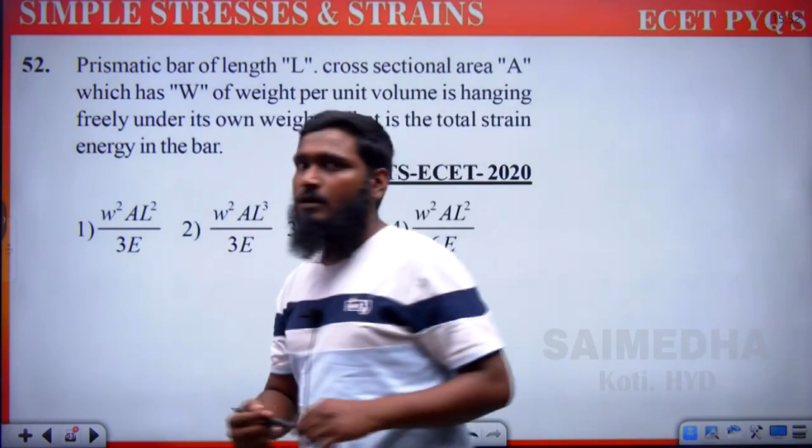Now let us see the next question. A prismatic bar of length L, cross sectional area A, with W weight per unit volume, is hanging freely under its own weight. What is the total strain energy in the bar?

We have just discussed strain energy. Strain energy U is equals to half into load into extension, that is half into P into delta. This formula is used whenever the load is constant.

Now if the load is varying, we have another formula. When the load is varying, U is equals to the integral from 0 to L of P square dl, divided by 2AE. This is the formula we use.

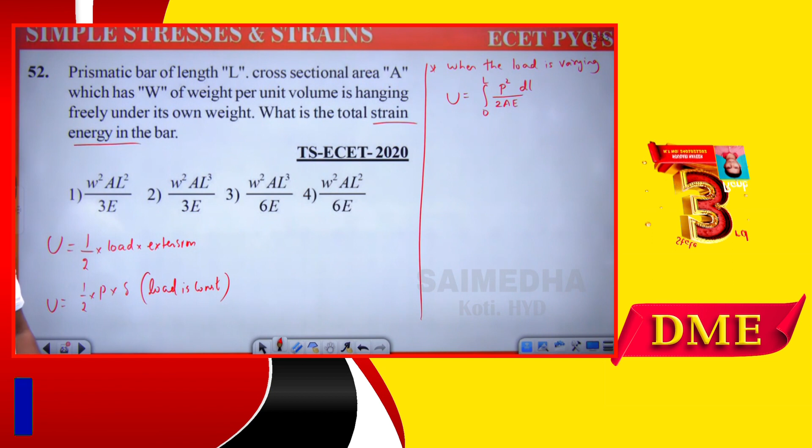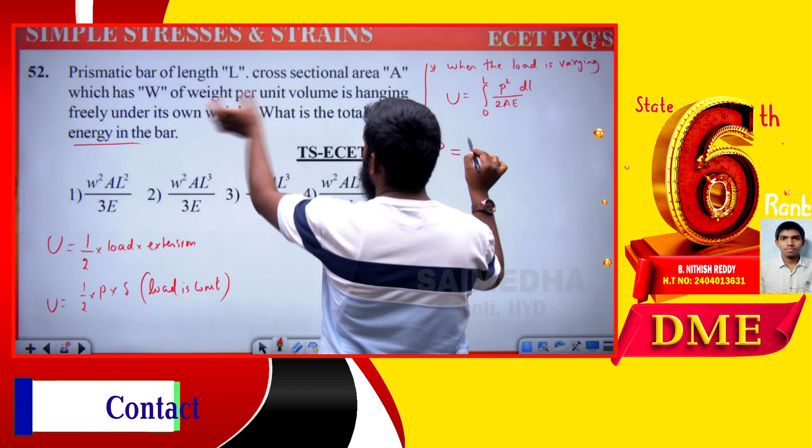Now to find the load, due to its self weight, what is the load? The P value we take is equal to specific weight. Specific weight means weight per unit volume, W. Volume we take as A into L.

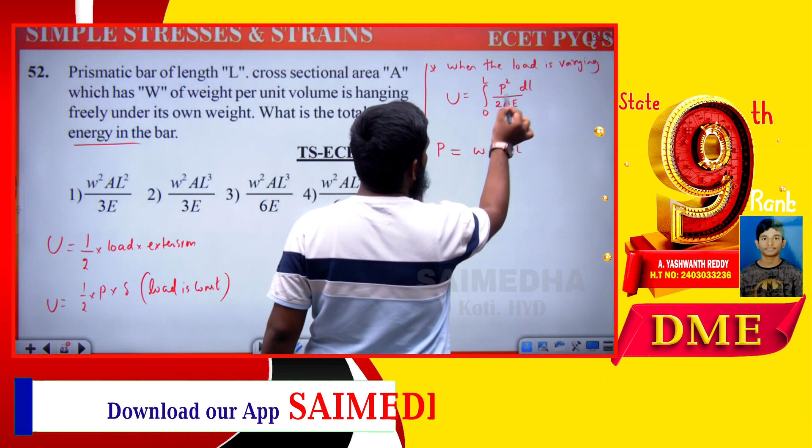Specific weight into volume, where volume is area into length. So in place of P, we substitute this complete term. So U is equals to integral from 0 to L of W square into A square into L square dl, divided by 2AE.

Now one A gets cancelled, and all these terms are constant. Integral of L square means we use the integration formula, integral of x dx equals x square by 2. Similarly, integral of x square dx equals x cube by 3. Whatever limits we have, we substitute upper limit minus lower limit.

So here, U is equals to W square A divided by 2E, written as it is. Now, integral of x square is x cube by 3. Similarly, integral of L square is L cube by 3, with limits 0 to L. Now we substitute these limits, upper limit minus lower limit.

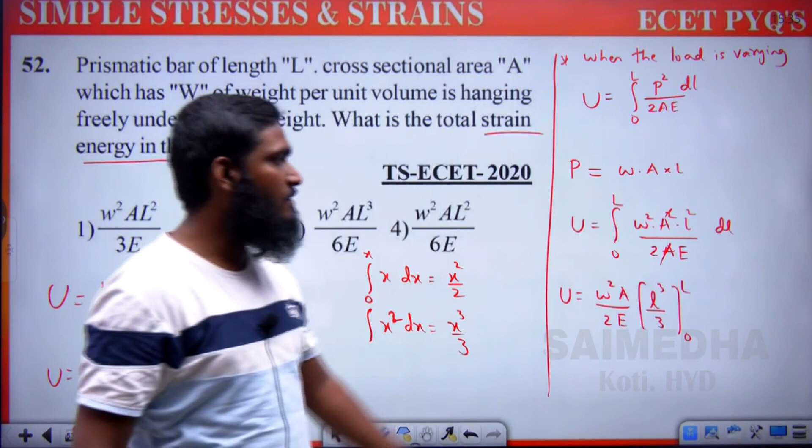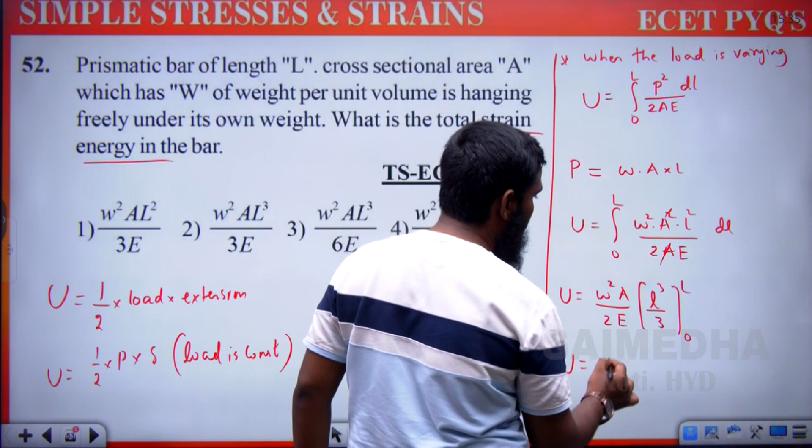Upper limit means substituting L, minus lower limit, substituting 0, which becomes zero. So directly we get W square A into L cube divided by 2 into 3, which gives 6E.

Now let us check the answer we are getting.

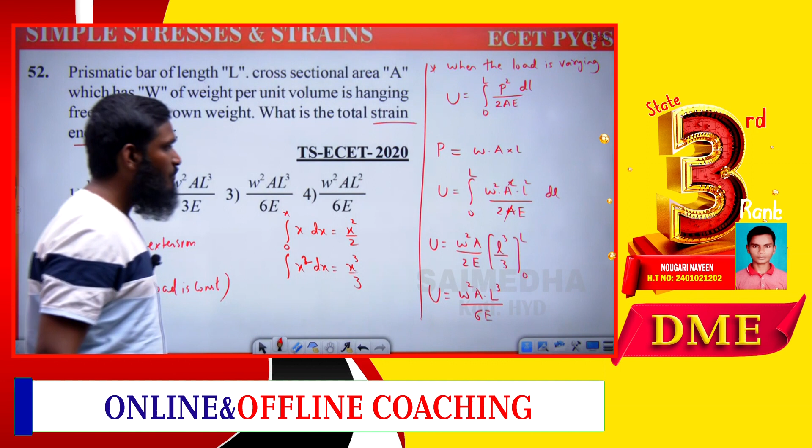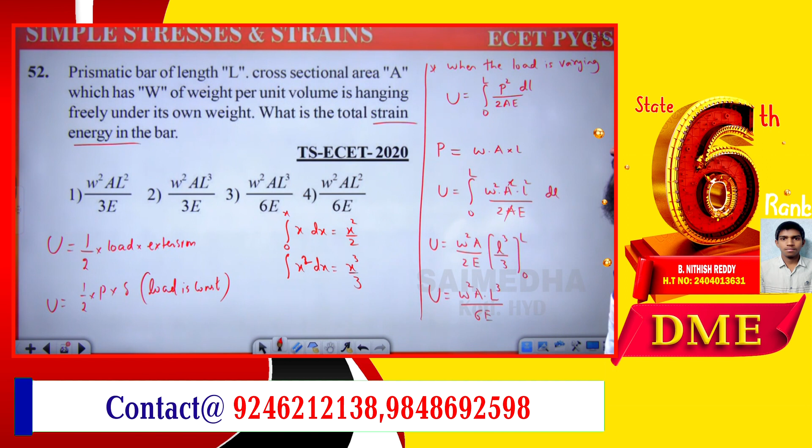So W square A L cube divided by 6E. Divided by 6E means let us go with the third option. W square AL cube divided by 6E. Third option is correct. Now let us go with the next question.

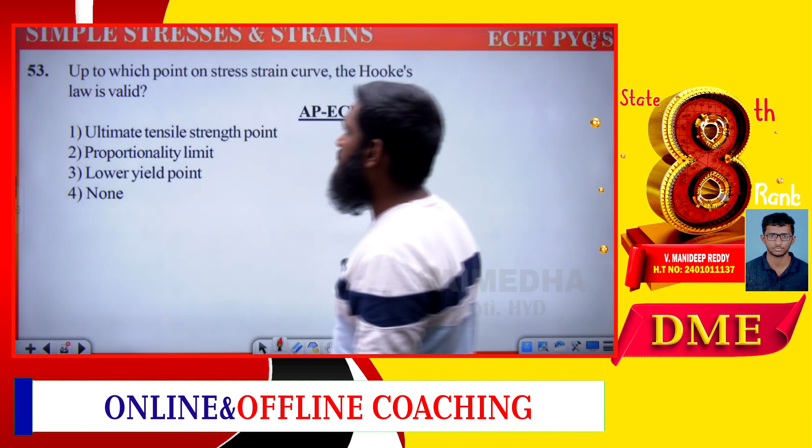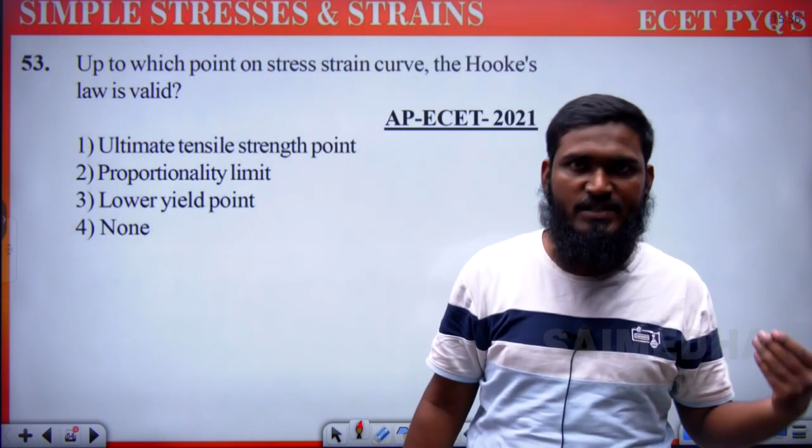Up to which point on the stress strain curve is Hooke's law valid? This question has been repeated many times. If proportional limit is mentioned, then we have to go with that option. If proportional limit is not given, then we have to take it as within elastic limit. As per our options, proportional limit is already mentioned, so the second option is correct. Hooke's law is valid up to the proportional limit. Second option is correct.

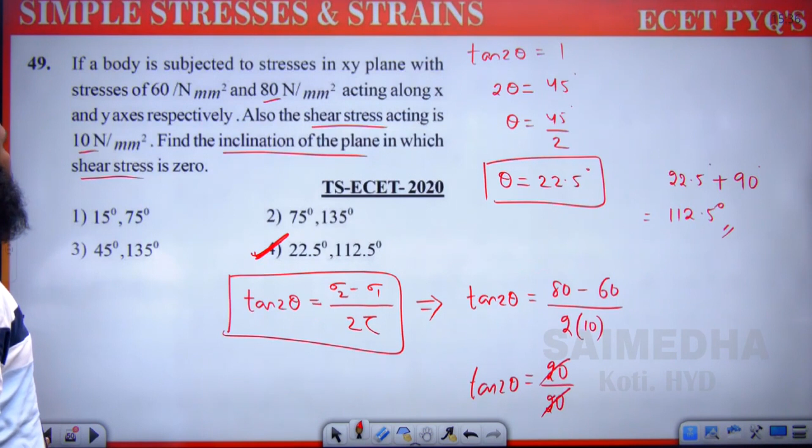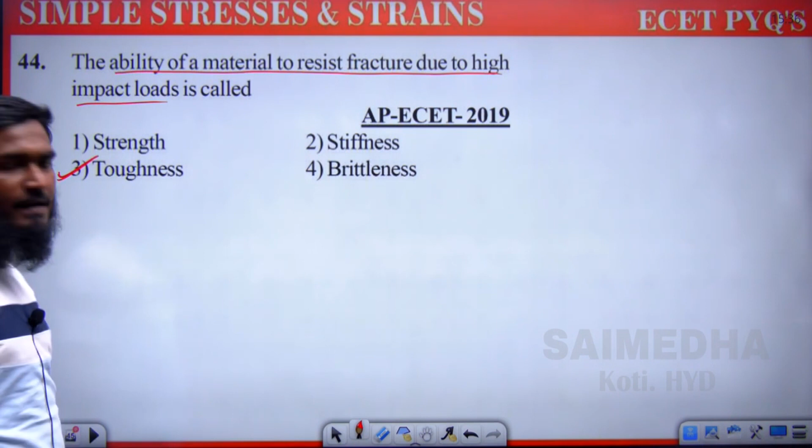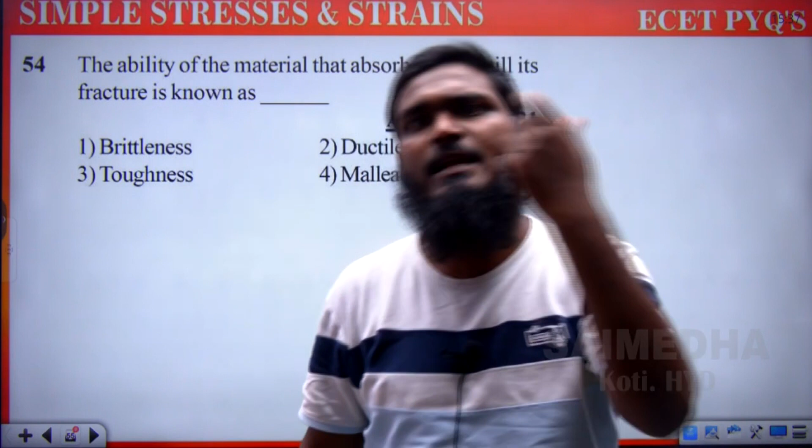Now next, the ability of the material that absorbs energy till its fracture. Just now I have given you some toughness definition, either this part or one more toughness part we have taken over here. The ability of the material to resist fracture due to high impact loads, we have also taken as toughness. One more definition we are having: the ability of the material that absorbs energy till its fracture - that we call toughness. If it is within the elastic limit, same definition, but instead of fracture, within elastic limit is given, then we have to call it resilience. So over here let us go with the toughness part.

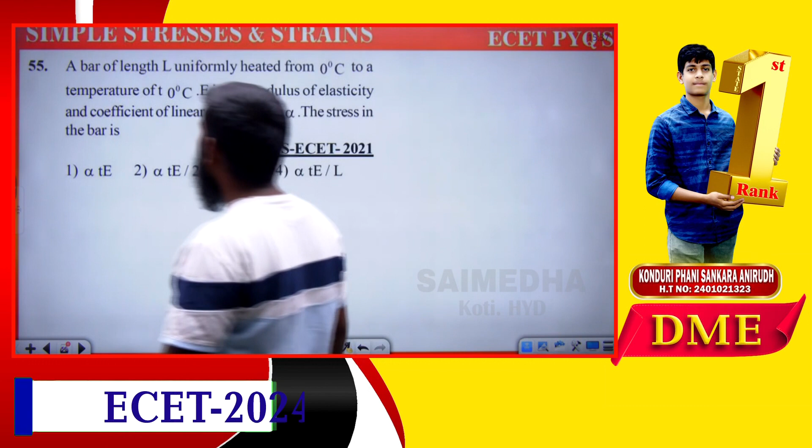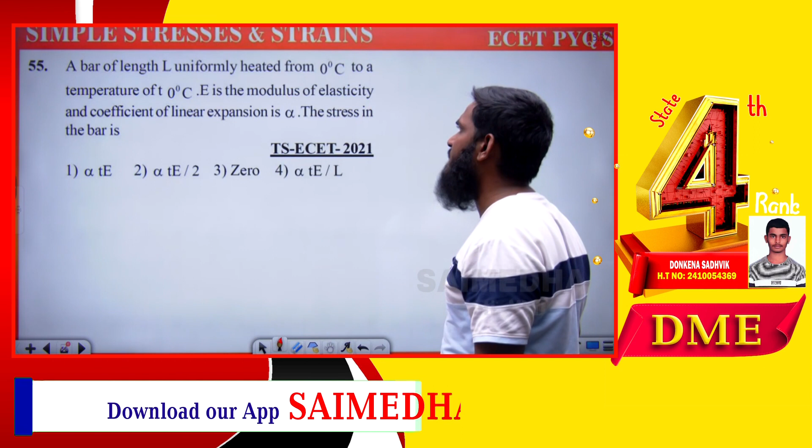Option 3 is correct. Now next question, a thermal part is given: a bar of length L uniformly heated from 0 degree to a temperature, E is modulus of elasticity and coefficient of linear expansion is alpha, find the stress in the bar. We are having this simple formula. What is the thermal stress formula?

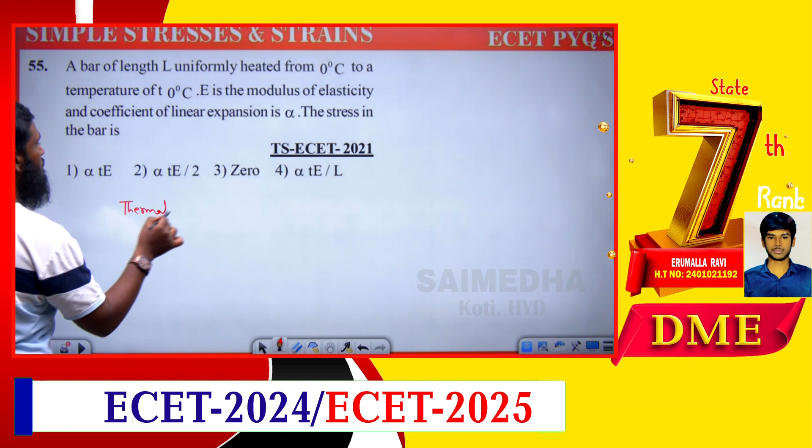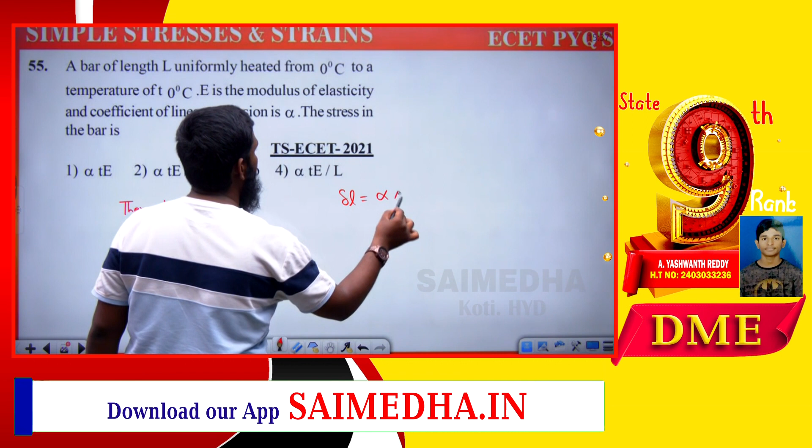Thermal stress formula - before writing it, what is the delta L formula, the elongation formula? Elongation formula we have it as alpha delta T into L, that is delta L formula. Similarly, the thermal stress formula we have is alpha delta T into E. We have taken this part.

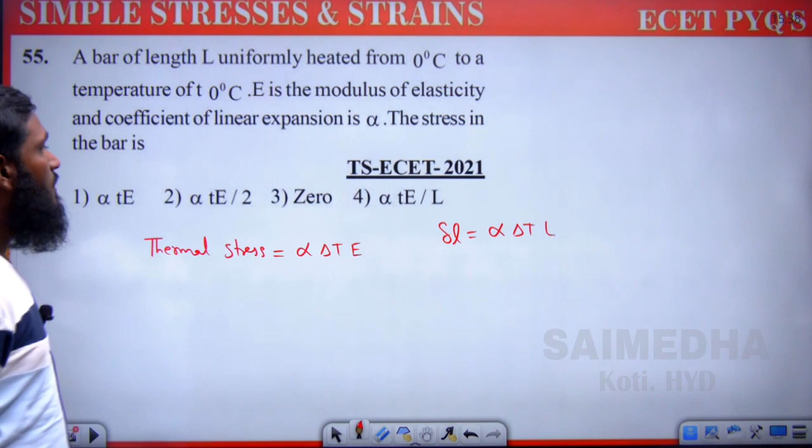Understood? Suppose what was given means we are having strain, thermal strain. So thermal strain we have the formula as alpha into delta T. Only this much we have, alpha into delta T. Now if you want to find out thermal stress, in the place of strain what we write is sigma by E. It equals alpha into delta T. Now it becomes sigma equals alpha into delta T into E. Like this we are getting this formula, alpha into delta T into E.

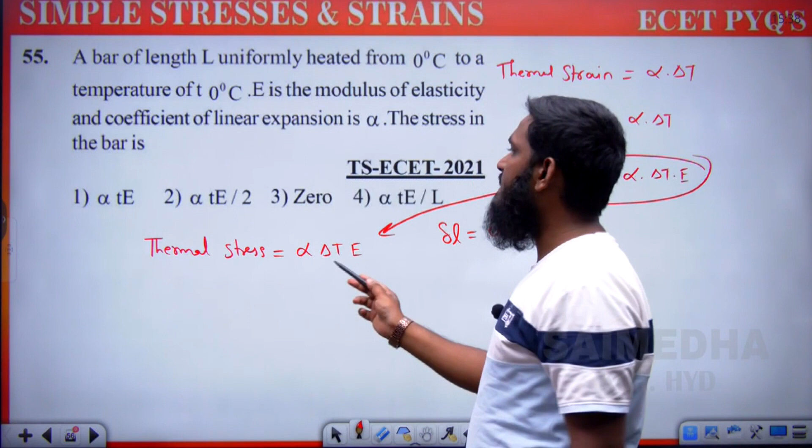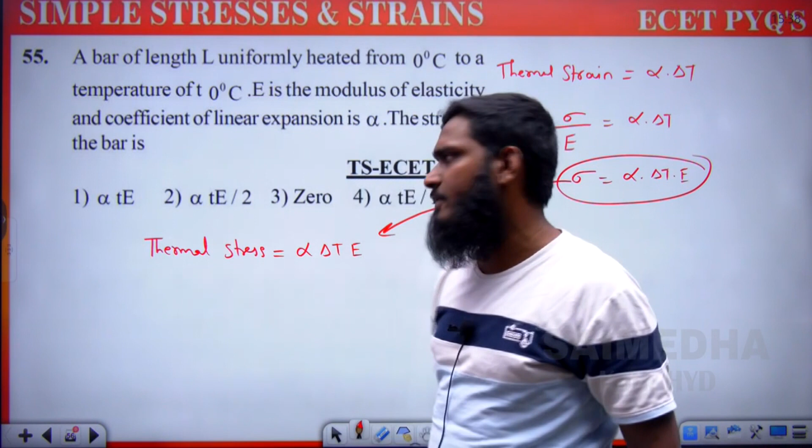Alpha means the coefficient of linear expansion. Delta T means change in temperature, T2 minus T1. E means modulus of elasticity. Or else directly we can write T also - if delta T is not given, some T part will be given, we can go with that. So alpha T E means first option, this first option is correct.

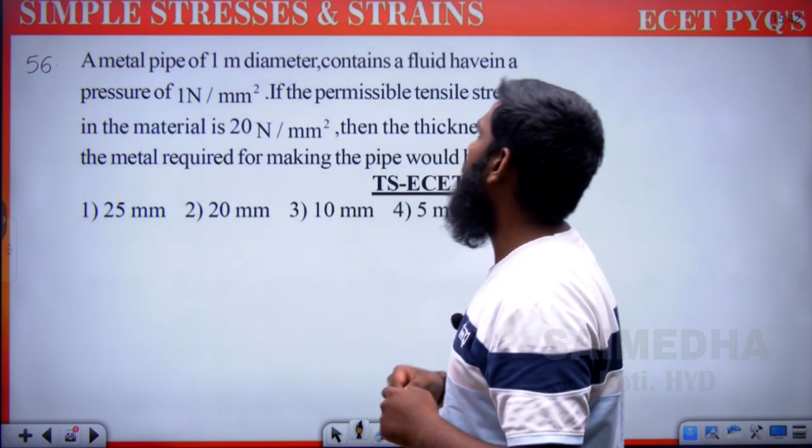Now let us see the next question. A metal pipe of 1 meter diameter contains a fluid having a pressure of 1 Newton per mm square. If the permissible tensile stress in the material is 20 Newton per mm square, then the thickness of the metal required for making the pipe is?

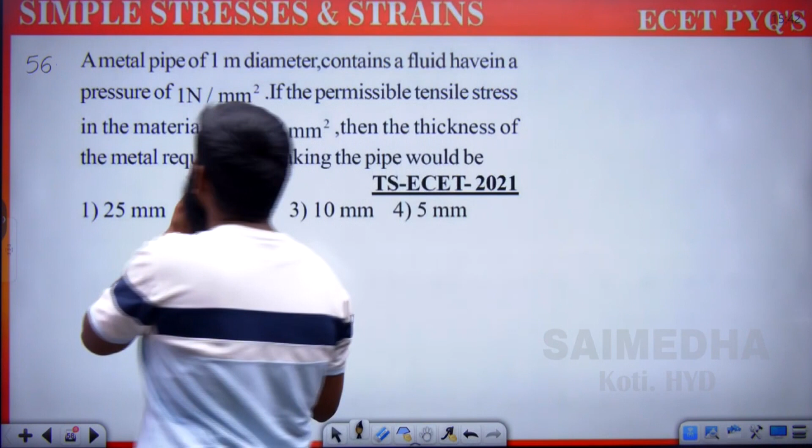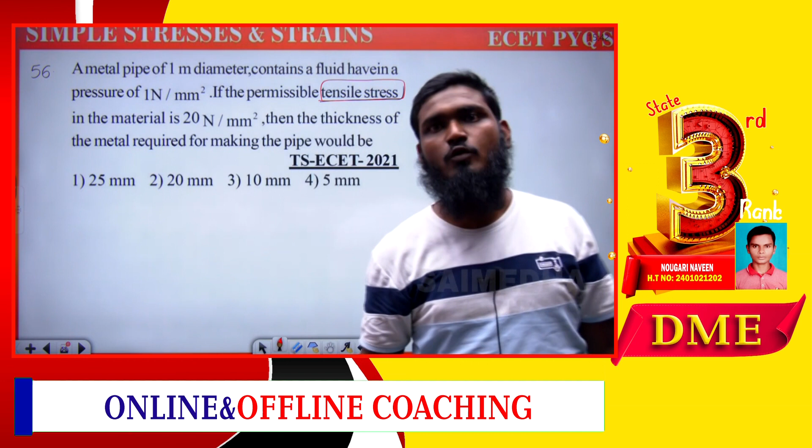Now it has been given that tensile stress is given. We have discussed one of the topics as tensile stress. It is also coming under hoop stress. Tensile stress is one type of, and hoop stress it is one of the type of, tensile stress - like this we have taken.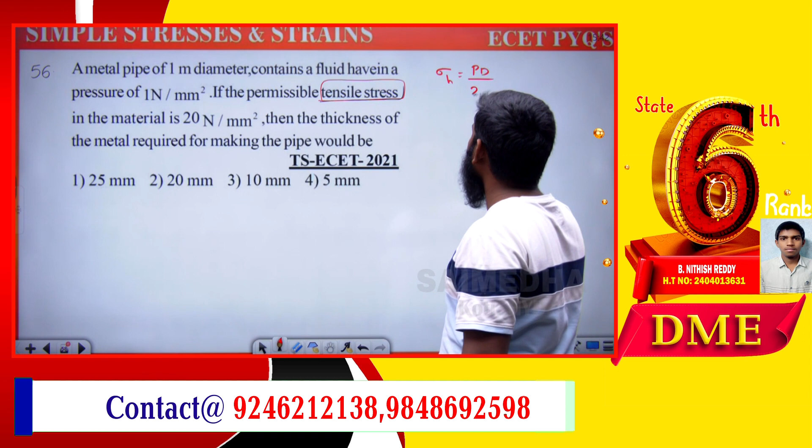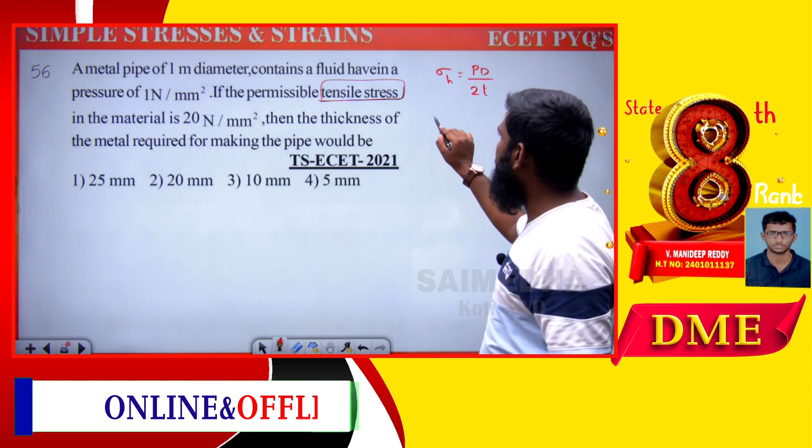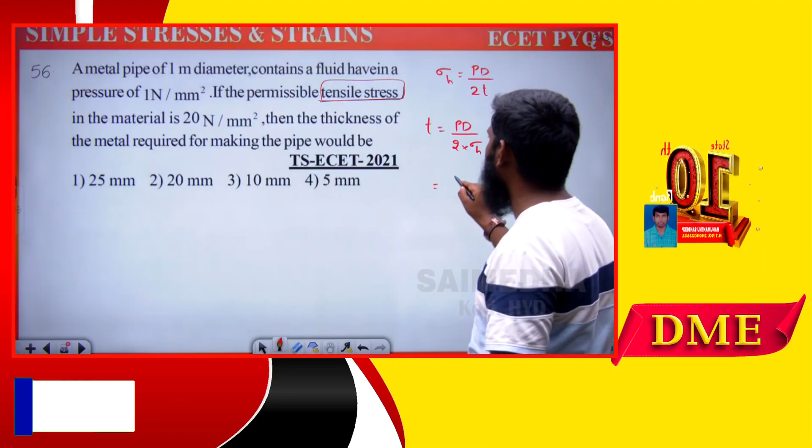So I have given you one formula for that: Sigma H equals PD divided by 2T. Pressure we are having, diameter we are having, thickness we are having, hoop stress we are having. Hoop stress is nothing but tensile stress. Now in this we have to find out the thickness. If you want to find the thickness, let us take this part: thickness equals P into D divided by 2 into sigma H. What is the P value we are having? P means pressure, 1, and what is the diameter we are having?

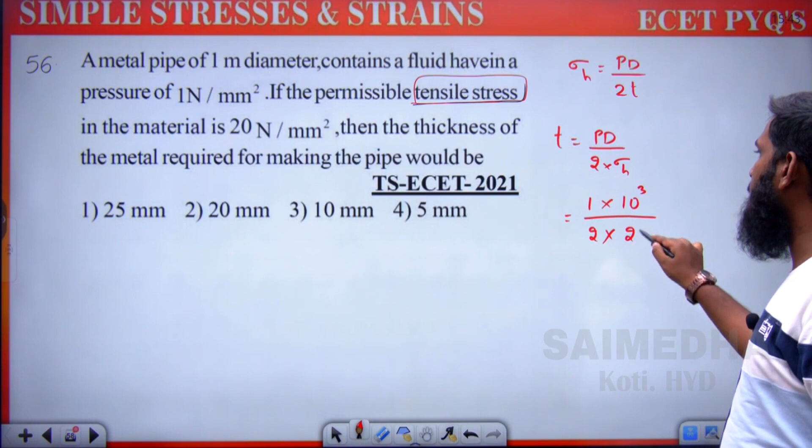Diameter is 1 meter, given. Let us try to convert it into mm. So converting into mm, it will be 1 into 10 cube, divided by - now 2 we are writing as it is. Now sigma H, what we are having? Stress we have it as 20. So we are taking this part as 20. Now what is the answer we are getting over here?

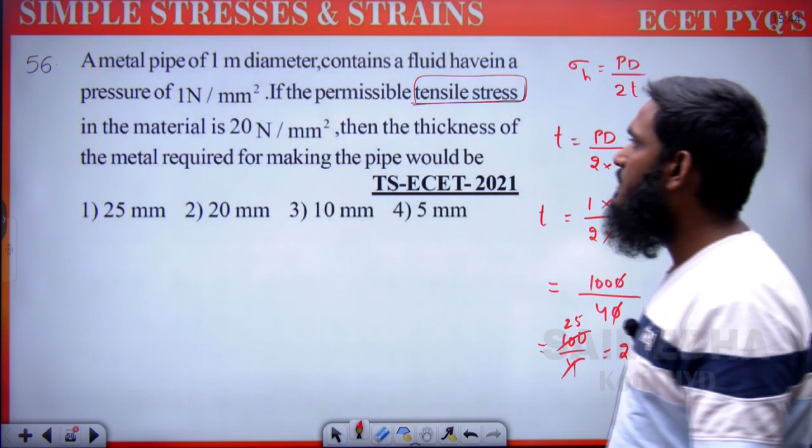What is the answer we are getting? It is equals to 1000 divided by 2, 2s are 4, and this part will be 0, 1 0 1 0 gets cancelled. So it is equals to 100 by 4. 100 by 4 means how much? 4 1s are 4, 2s are 8, which is equals to 25. So we are getting the answer as 25 mm. So what is the thickness we are getting? 25 mm means let us go with the first option. Option 1, 25 mm is correct.

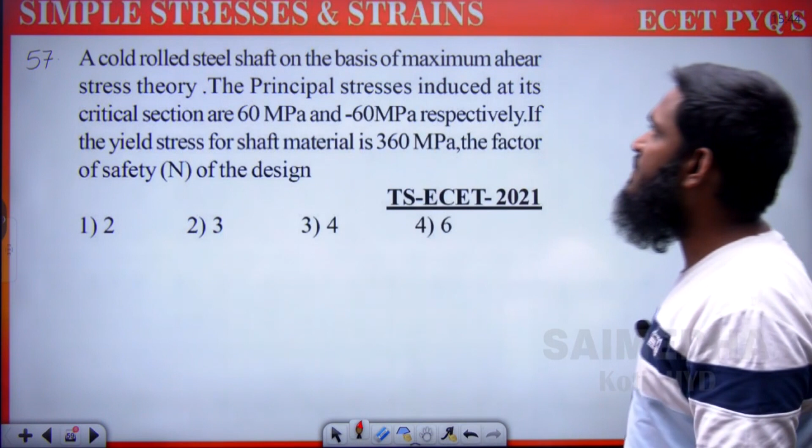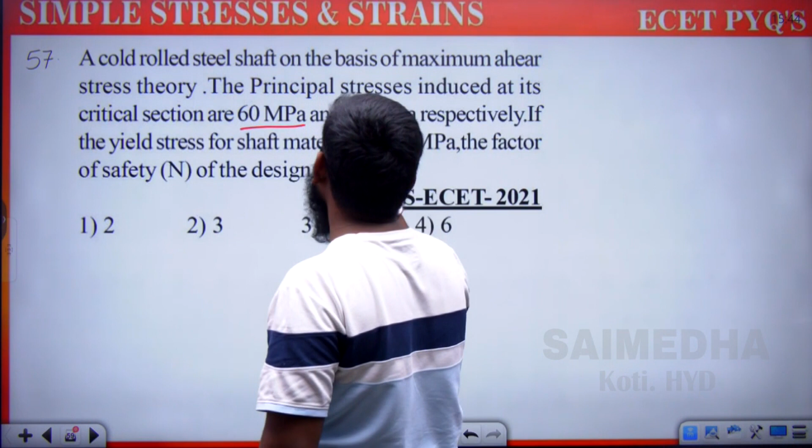Now next question. A cold rolled steel shaft, on the basis of maximum shear stress theory, the principal stresses induced at its critical section are 60 megapascal and minus 60 megapascal respectively. If the yield stress for the shaft material is 360 megapascal, find the factor of safety. Already we have done this type of question.

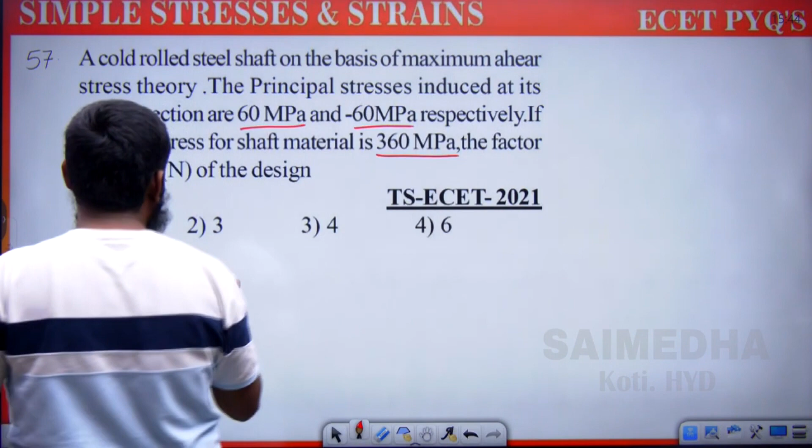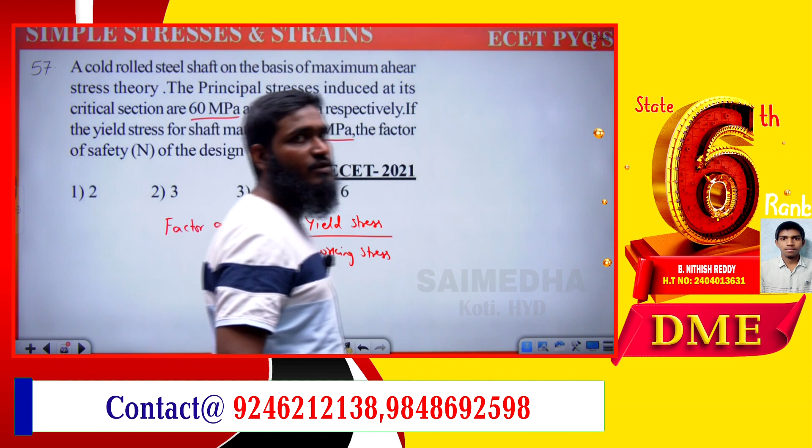So what is the formula we are having for factor of safety? Factor of safety is equals to yield stress divided by working stress. In the previous question, working stress we have taken as P by A, load by area. But over here, working stress means what we are having? If you want to calculate working stress...

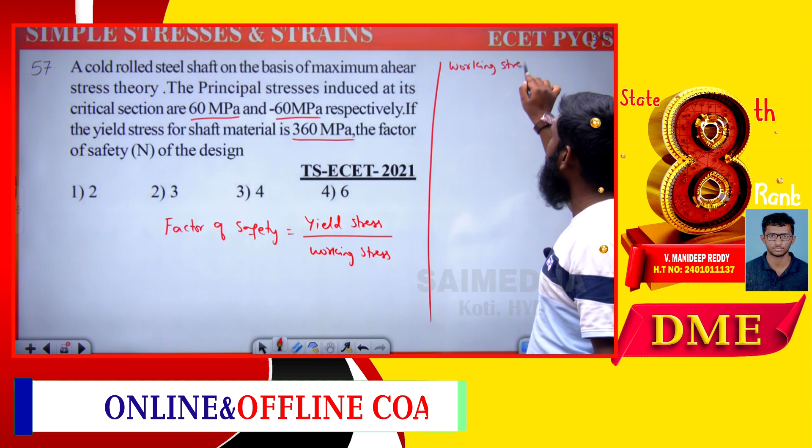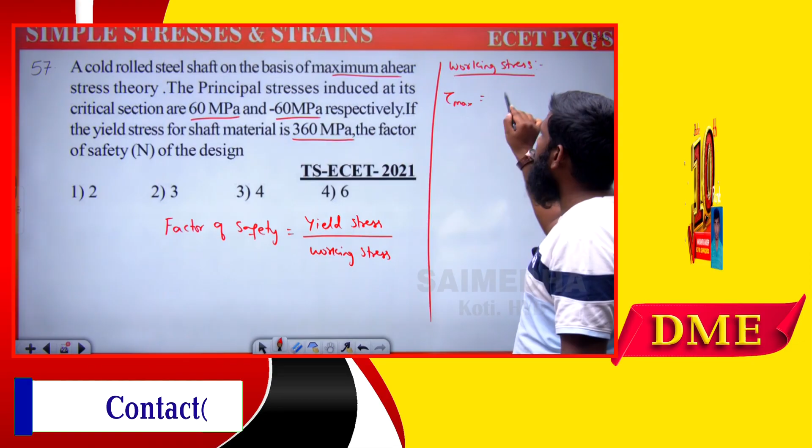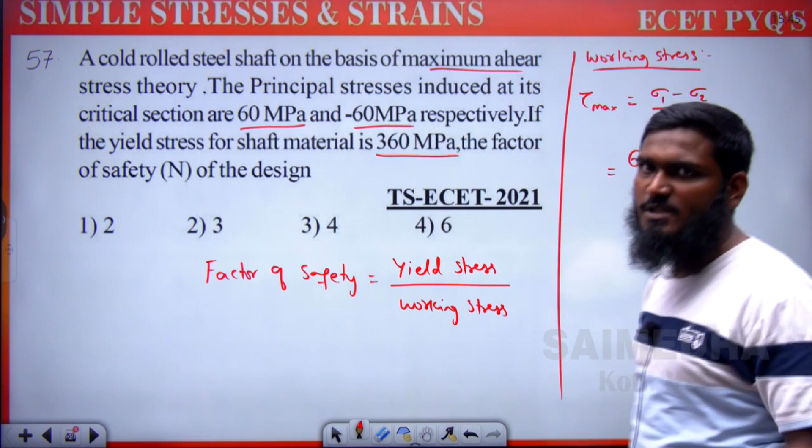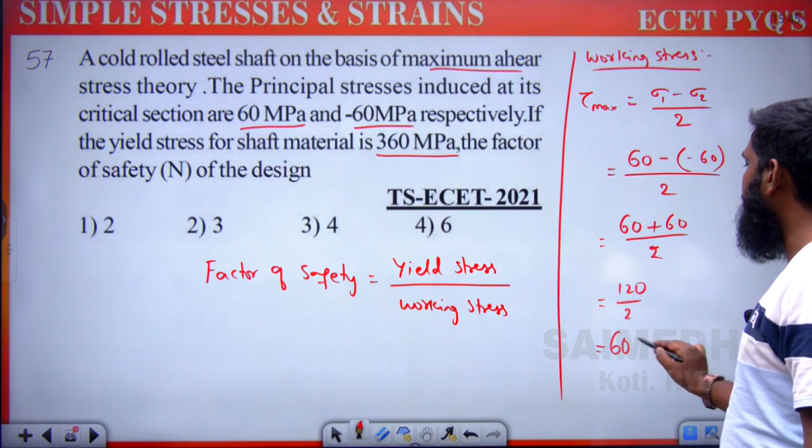What is given over here? Maximum shear stress theory concept we are having. So tau max is equals to half of the difference of the principal stresses, means sigma 1 minus sigma 2 divided by 2. This one we are having as the formula. What is sigma 1 value? 60. Then sigma 2 value, minus 60, maximum or minimum also we can take over here. So 60 minus minus 60 divided by 2, which is equals to 60 plus 60 divided by 2, which is equals to 120 divided by 2, it is equals to 60 megapascal. What we are getting the answer? 60 megapascal. Now let us substitute over here.

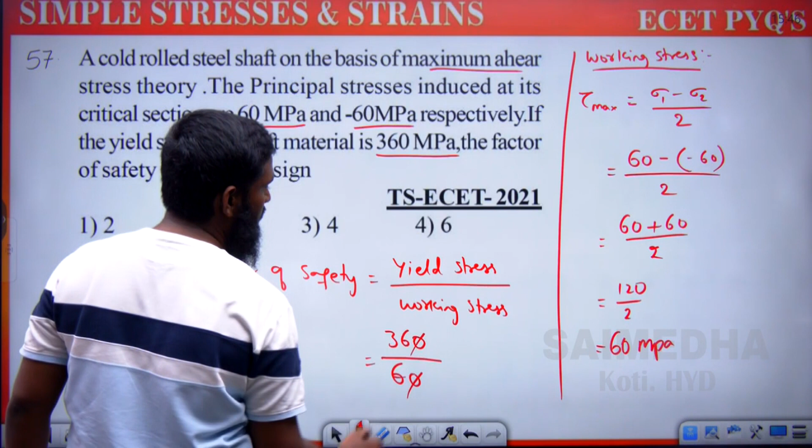So it is equals to, what is yield stress we are having? Yield stress is equals to 360 megapascal divided by working stress, 60. So 0 0 gets cancelled, 6 1s are 6. So it is equals to how much? 6. So factor of safety we are getting the value as 6, means option 4. Option 4 is correct.

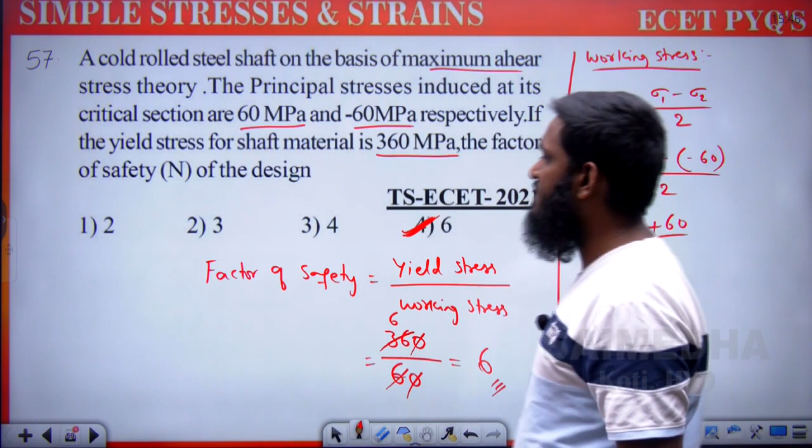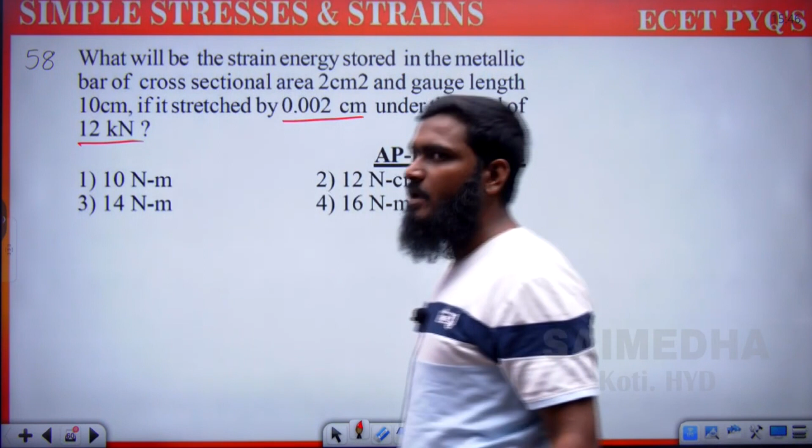Now next question, what will be the strain energy stored in the metallic bar of cross sectional area 2 cm square and gauge length 10 cm, if it is stretched by 0.002 cm under the load of 12 kilonewtons? Just now I have given you the formula, whenever the load is constant, what is the strain energy formula we are having? Strain energy is equals to half into load into whatever the extension we are having, means delta.

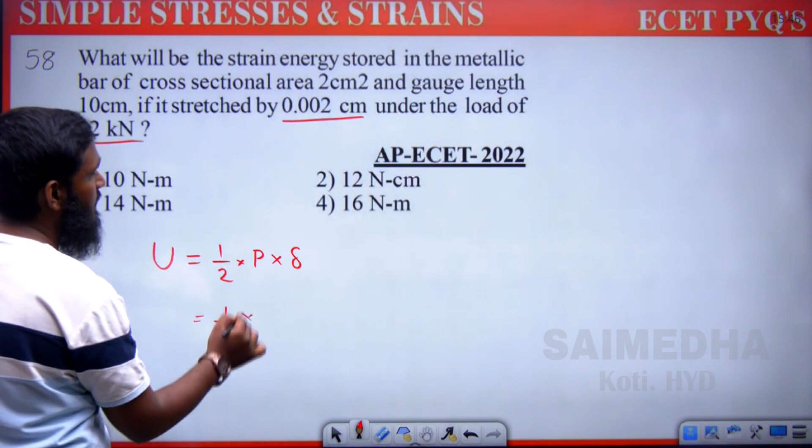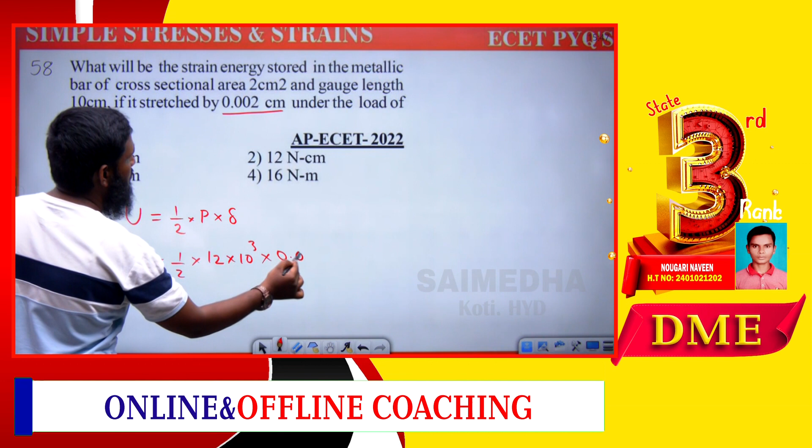Let us substitute directly over here. 1 by 2 into load, means 12 into 10 cube, kilo means 10 cube we have taken into. Now what is delta we are having over here? 0.002. This part we have taken. No need to write any area value or length value, no need of that part. Directly we are having the formula as half into load into extension, so we have substituted directly.

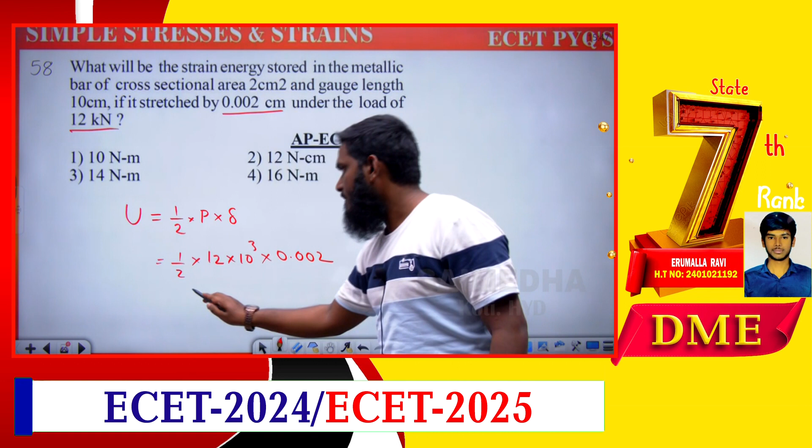Now what will happen? This is 1 by 2 into 12. If you are multiplying this 10 cube into 0.002, it will become 2. So this 2 gets cancelled. Now what is the answer we are getting? 12. So the answer is 12 Newton centimeter. Newton centimeter means option 2 is correct.

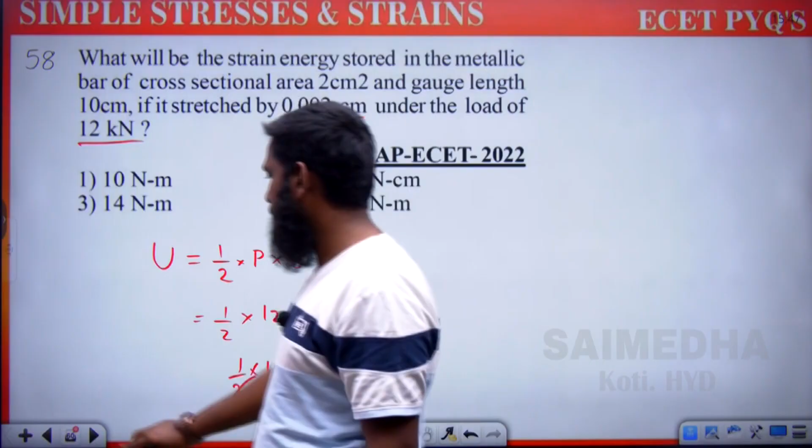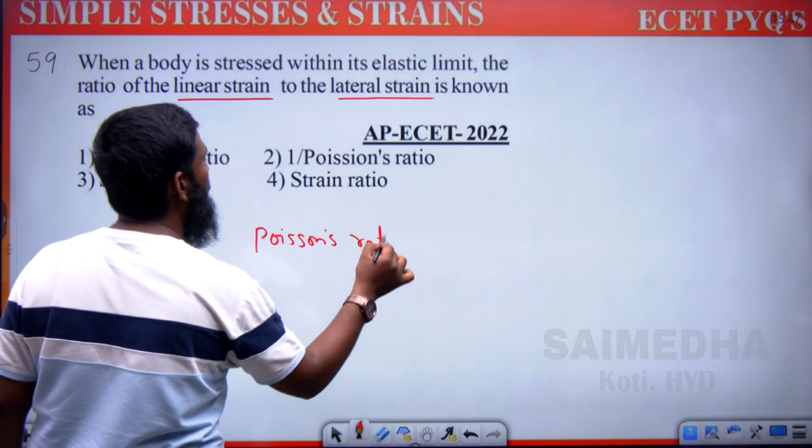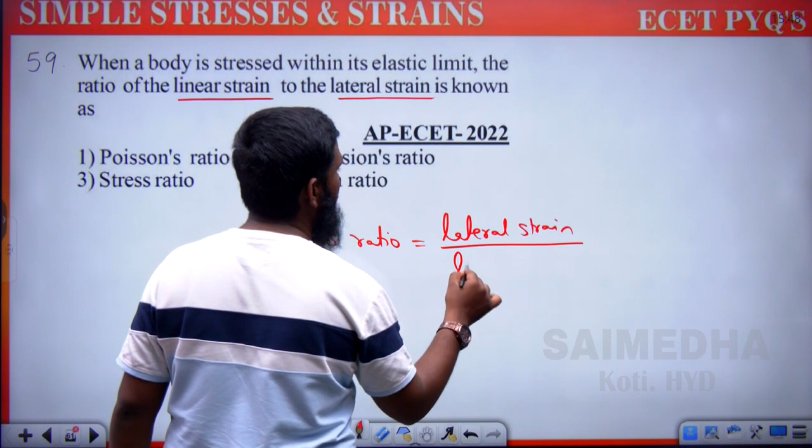Now let us go with the next question. When a body is stressed within the elastic limit, the ratio of linear strain to the lateral strain - listen here carefully, linear strain to lateral strain. So already we have discussed this part, Poisson's ratio. What is the formula for Poisson's ratio? Poisson's ratio means lateral strain divided by longitudinal strain. Longitudinal means, or else it will be given as linear strain. So whenever we are having lateral strain by linear strain, then we are calling it Poisson's ratio.

So for confusion, it is given as Poisson's ratio as well as 1 by Poisson's ratio. 1 by Poisson's ratio means, now in the question it is given like linear strain by lateral strain. If you are doing reciprocal of this, lateral strain by linear strain - in the question it is asking reciprocal. So if you are doing reciprocal of this, means linear strain by lateral strain.

Linear strain by lateral strain. If you have done reciprocal of this, for this also we have to do the reciprocal, means 1 divided by Poisson's ratio. What we can write over here? 1 divided by Poisson's ratio. So which option will be correct?

Don't be in a hurry. Don't go directly for the Poisson's ratio. First see this, what ratio we are having? Lateral by linear or linear by lateral? Depending upon that, we have to select the option over here. So we are having the correct answer as 1 by Poisson's ratio. So option 2 is correct.

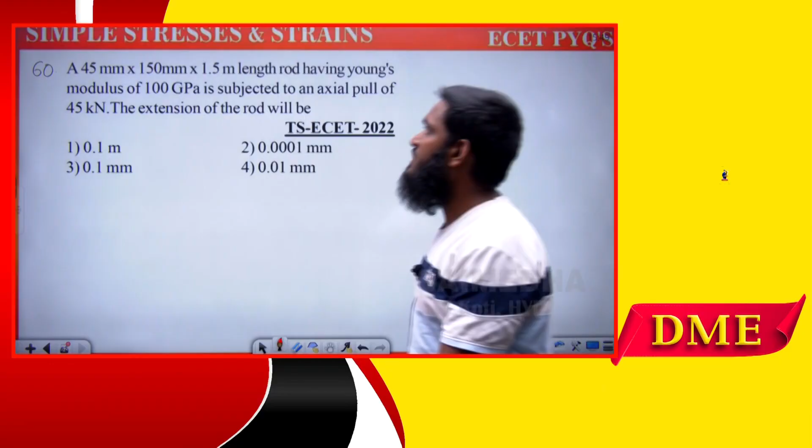Now let us see the last question over here. 45 mm into 150 mm into 1.5 meter length. This is length, 1.5 meter length, and this is area. We can take this part as area. Having Young's modulus, we are having 100 GPa, is subjected to an axial pull of 45 kilonewton. The extension of the rod will be.

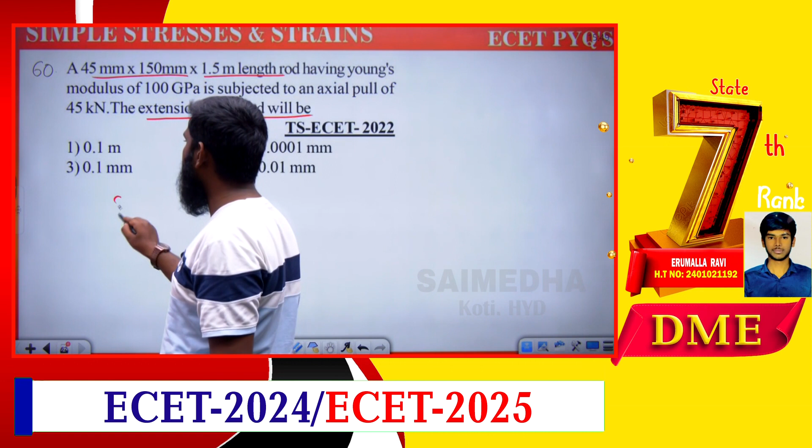Now we have to find out extension over here. If you want to find out extension, means delta L. What is delta L formula? Direct formula what we are having? PL by AE, PL by AE.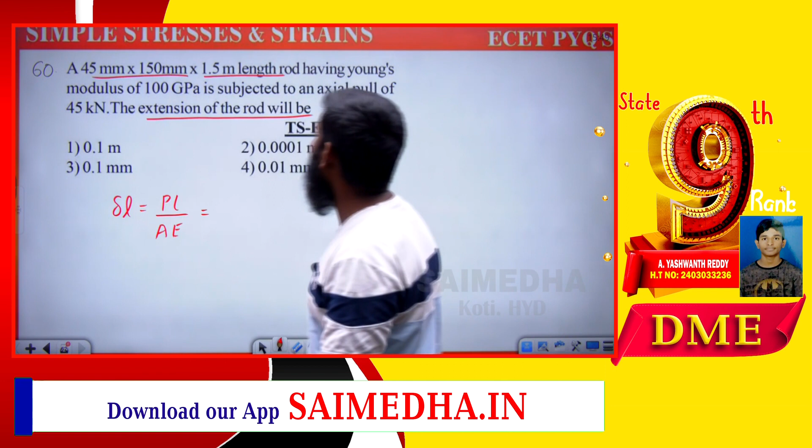Let us substitute over here. P means what we are having now? Axial pull of 45 kilonewtons. So 45, let us take this part as 45 into kilo means 10 cube. Into. Now what is L we are having? L means length, 1.5 meters we are having, 1.5. Again if you are converting from meters to mm, means it will be 10 cube.

PL divided by, now what is area? Area is already given, 45 into 150. So 45 into 150, both are in mm only, so we are writing in mm. Now E value, what is E value we are having over here? E is 100 gigapascal.

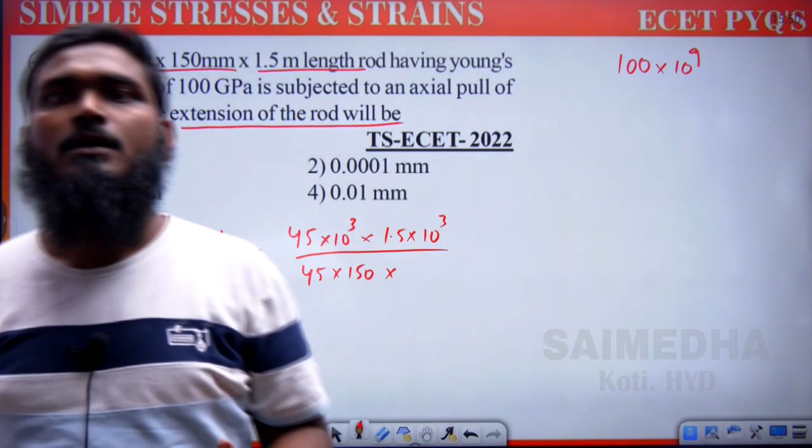Now let us see this part. 100 giga means what we are having? 10 power 9. Now Pascal means Newton per meter square. If you want to convert that from Newton per meter square to Newton per mm square, then what we have to take over here? 10 power minus 6 Newton per mm square. So now it will become 100 into 10 cube is left now. So 10 cube we have taken, or else directly we can take it as 1 into 10 power 5 Newton per mm square.

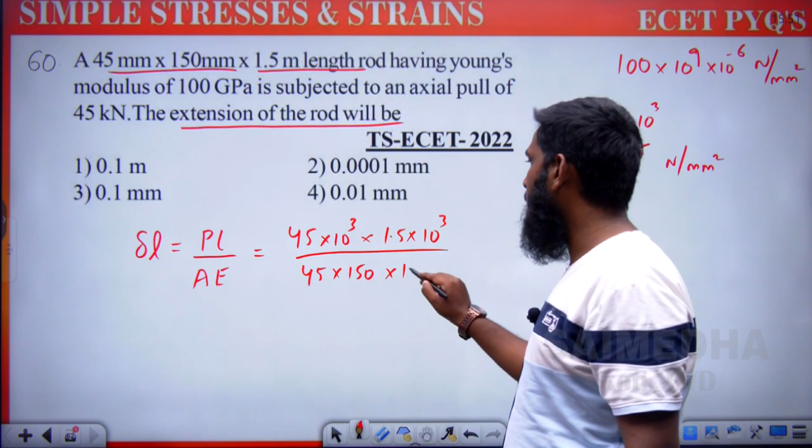This value we are taking. So let us substitute over here, 1 into 10 power 5. This part we have taken. Now if you are doing cancellation over here, means what we are getting the answer? This 45 gets cancelled.

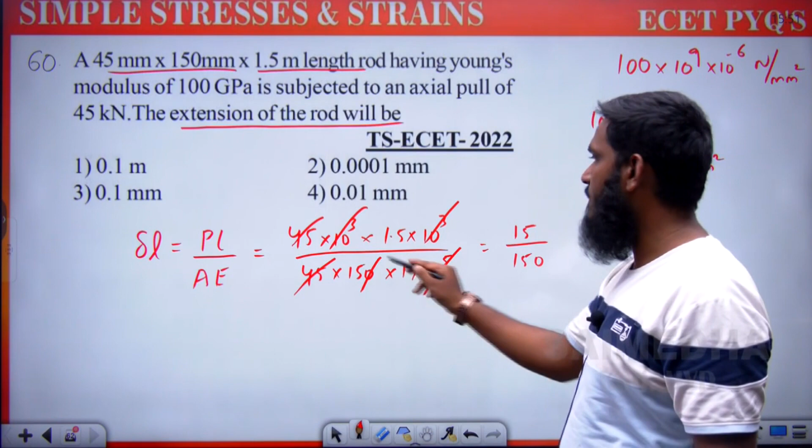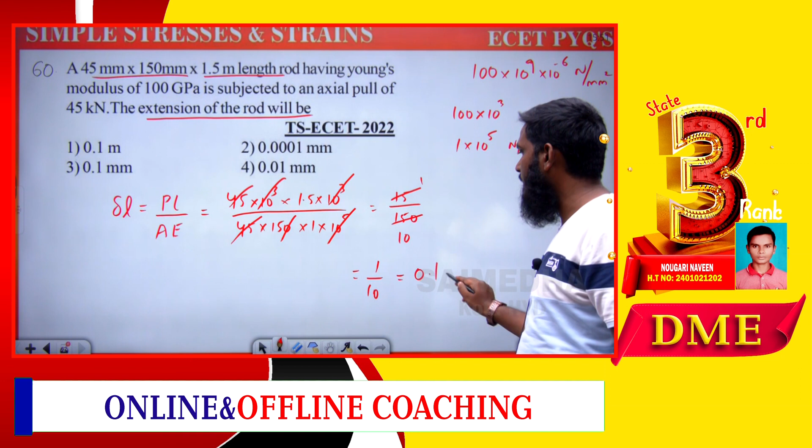Now what is left means this 10 power 6 and this 6, this part gets cancelled. Now what is left over here? This is 1.5, means 15 divided by, and this is 150. This point we are removing means we have written 0 over here. So it become now, this is 1s, this is 10s. So it is equals to 1 by 10. 1 by 10 it is equals to how much? 0.1 mm, because we have converted all the units into mm.

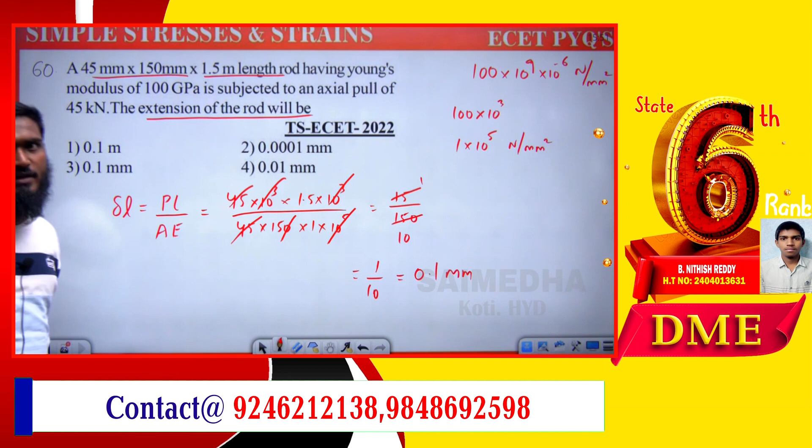But if you are seeing the options over here, we are having confusion. 0.1 meter is also given, 0.1 mm is also given. So as we have already converted in the starting itself, meter we have converted into mm, and we are following the units as mm over here, then which option will be correct? 0.1 mm. So third option will be correct.

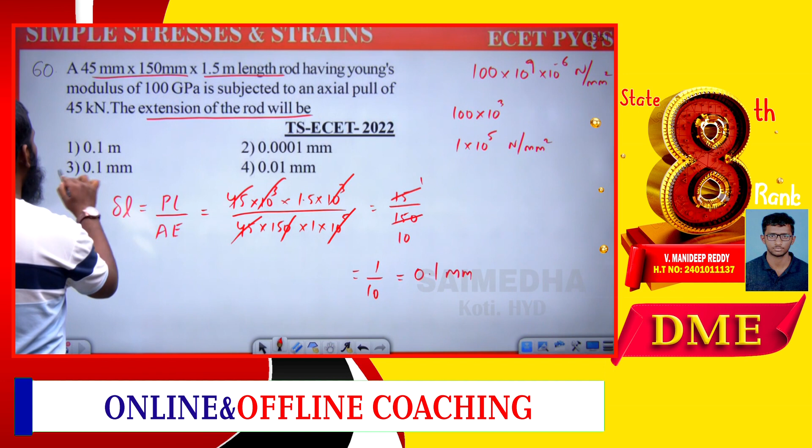So with this we have completed all the previous ECET questions, previous year questions of the topic simple stresses and strains.